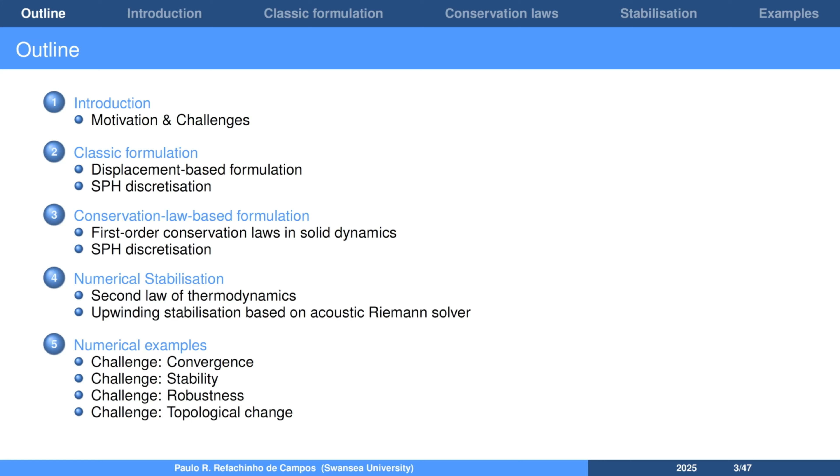So, what exactly do we mean by fast dynamics? Dynamic events can be classified in several ways. For example, in terms of the differences in the geometry and materials of the targets and projectiles. Or another common classification is based on the characteristic velocity involved in the event.

This figure illustrates a range of scenarios at increasing impact velocities, including the drop test of a mobile device, a bird and aircraft collision, ballistics, and the impact of space debris on satellites. What these cases have in common is that they represent high-energy events occurring in a very short time, from milliseconds to less than a microsecond.

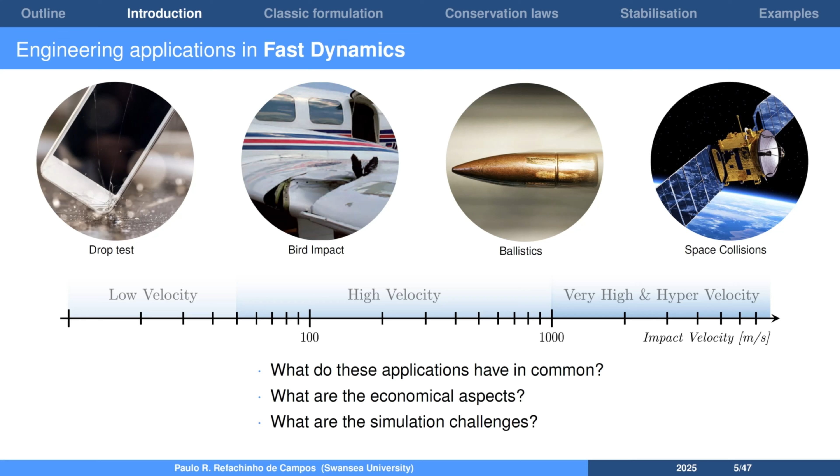Inertia and wave propagation are important features of these events, and they often involve large deformations and potentially fracture. These types of problems have great economical importance, and improving how we understand them can lead to safer and more effective designs. However, experimental testing in these areas is expensive and challenging, which makes computational simulation even more important. But these are complex problems to simulate, and that's why we are here.

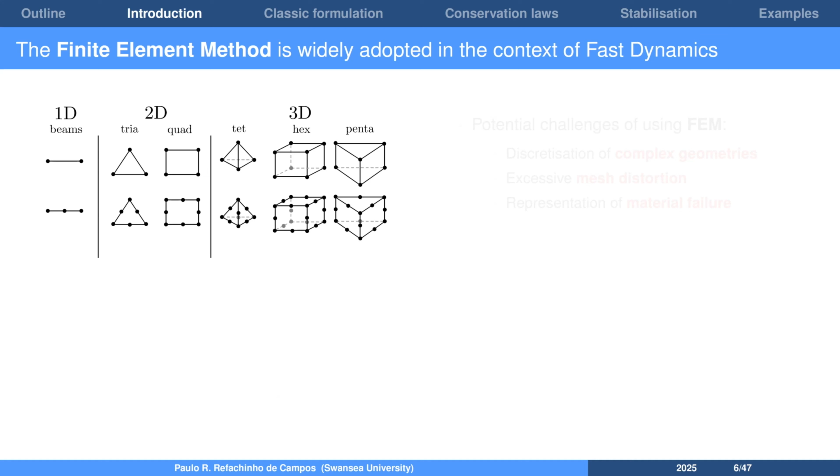The finite element method is well established and widely used in fast dynamics. For example, from impact penetration tests to a full vehicle crash simulation, finite element is the standard tool for many industries. However, there are some challenges that persist.

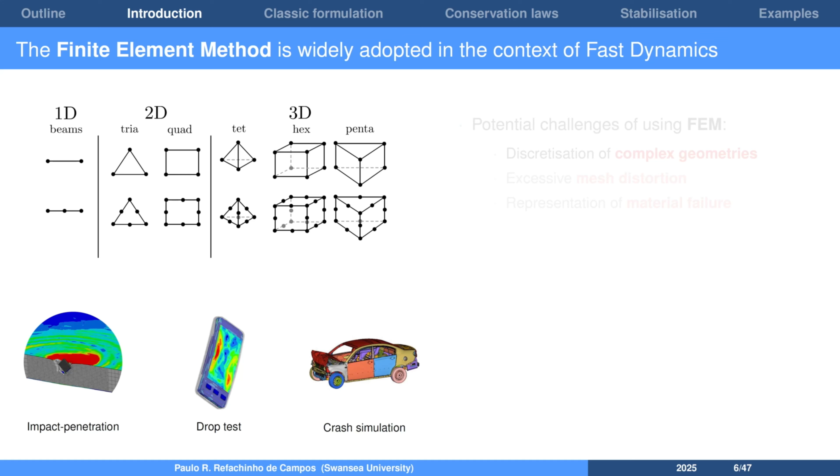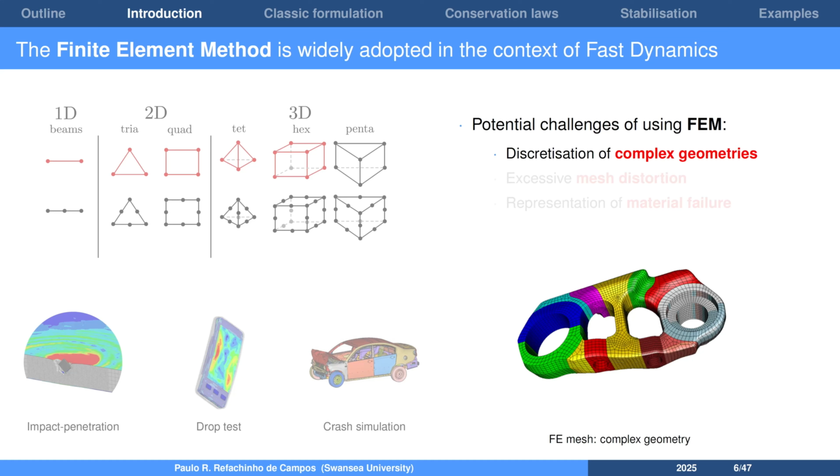For example, the time-consuming pre-processing of complex geometries, mesh distortion caused mainly by large deformations, which can compromise solution accuracy and may require adaptive remeshing, and the complexity of representing fracture, where some simplified element deletion methods can lead to very poor results.

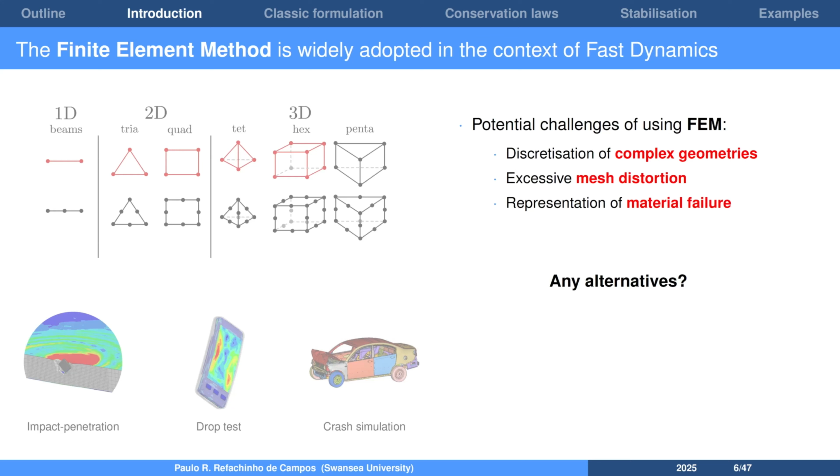And then this naturally raises the question, are there any other alternatives? One promising alternative lies in the family of mesh-free methods, specifically the Smoothed Particle Hydrodynamics, or SPH. SPH was the first truly mesh-free method introduced back in the 1970s in the context of astrophysics, and later on adapted for solid dynamics in the early 1990s.

It is a Lagrangian method, meaning it tracks individual particles as they move through space and time, making it especially well suited for solid dynamics. The core of SPH is interpolation theory. The main idea is to approximate a function using values at neighboring points weighted by a kernel function.

A key concept comes from the sifting property of the Dirac delta function, which theoretically allows function reconstruction but is impractical for computations. Instead, we replace the delta function with a smooth kernel function, which vanishes beyond a certain radius of influence.

Then, by applying particle integration, we approximate the integrals as summations over particles, forming the so-called SPH formulation. Typical kernel functions include quadratic, cubic spline, and Gaussian functions. And just as we approximate a function this way, we can also approximate its gradient by computing the gradient of the kernel function.

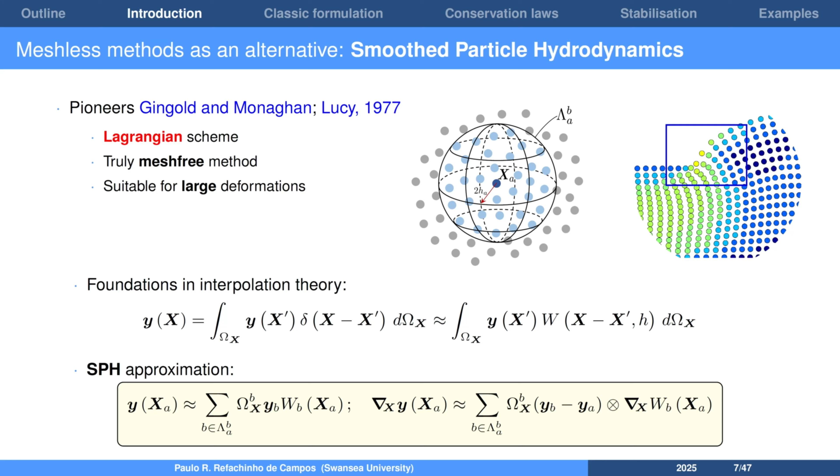SPH has gained popularity since the 2000s, and communities like SPHERIC have identified the SPH grand challenges, with the first of them being convergence, consistency, and stability. This challenge is about managing unphysical energy modes, tensile and pressure instability, and the overall accuracy of the method.

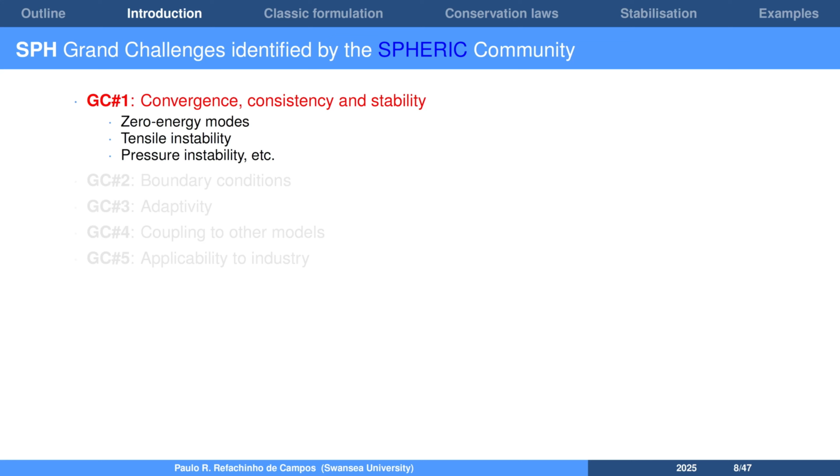Our key contribution is a first-order conservation law-based SPH formulation, which offers a more stable and accurate alternative to classical displacement-based methods. By approaching SPH from this perspective, we can capture a wider range of physics and borrow established techniques from other fields such as computational fluid dynamics. As we will see in this presentation, the conservation law approach facilitates the understanding and the introduction of numerical dissipation to address the grand challenge number 1.

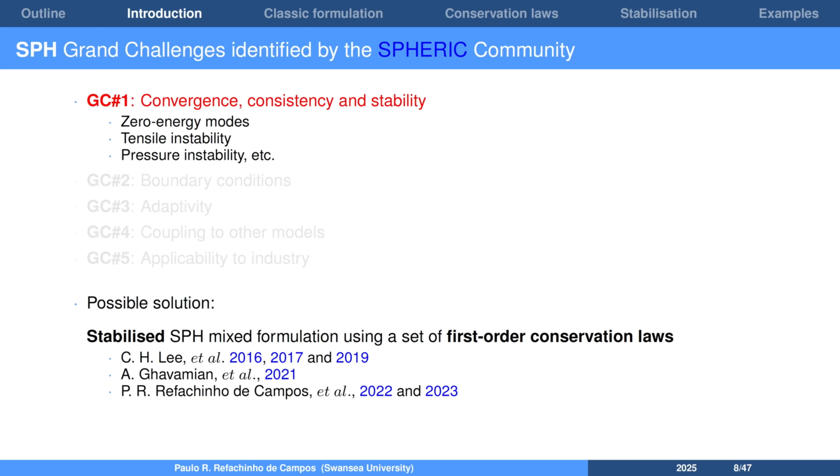Before diving into conservation laws, let's quickly revisit the standard displacement-based SPH formalism.

Let's consider a solid body deforming from its initial state to a deformed configuration. This deformation is described by a mapping function phi, which gives the current coordinates in terms of the material coordinates and time. From there, we can compute velocities and the deformation gradient.

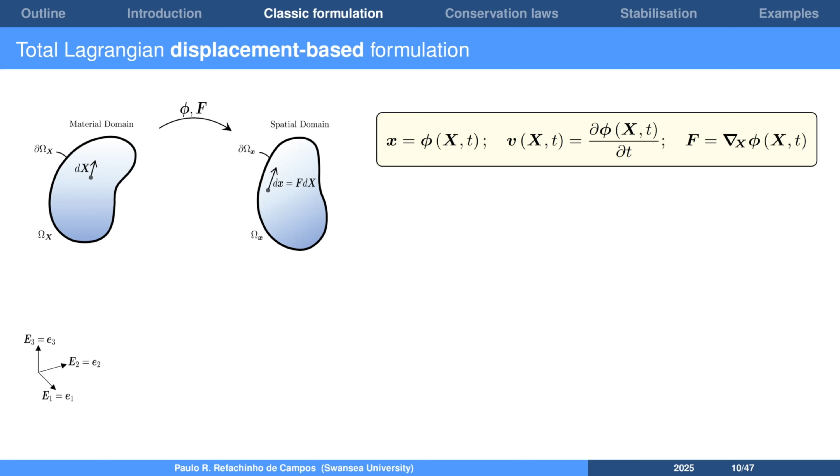In the total Lagrangian approach, we express the governing equations in the material configuration. For example, the equilibrium equation of solid dynamics states that mass times acceleration equals the divergence of the stresses plus body forces. To represent these stresses, we use the first Piola-Kirchhoff stress tensor, P, which depends on F, the deformation gradient. And how do we get P?

So we link stresses and strains through a constitutive model. Once we have P, we use it to update velocities and displacements.

Now here's something very important. The accuracy of F, especially in large deformations, directly affects the quality of the equilibrium solution. That is because first we solve the equilibrium equation to get velocities, then we integrate to obtain displacements. These displacements give us F, the deformation gradient. F is fed into a constitutive model which gives us stresses. And finally, these stresses go back into the equilibrium equation.

That's why many higher order or mixed-based formulations have been developed. The objective is to enhance this process.

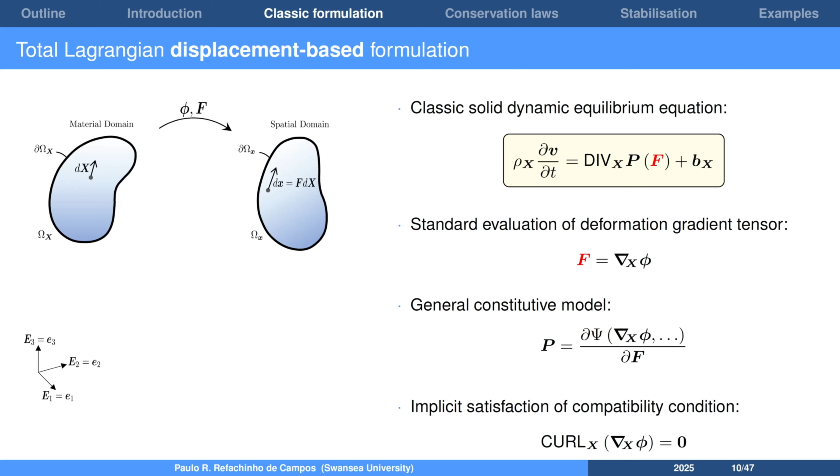Now, let's look at how we would apply SPH to approximate the deformation gradient. The SPH approximation that I presented earlier, a few slides ago, for a generic function gradient, works the same way here. The deformation gradient is essentially the gradient of the current coordinates given by phi with respect to the material coordinates. And we can easily compute the gradient of the kernel function and use it in the summation over particles to approximate F.

Mathematically, this looks similar to finite element shape functions. We basically multiply a kernel gradient by a volume term.

To improve the accuracy, we introduce a standard correction that modifies the kernel gradient by a correction matrix L. This is indicated by the tilde over the gradient symbol here. The use of this correction will ensure that the gradient of any linear field is exactly evaluated. We also artificially introduce the minus phi a term to ensure that the gradient of a constant function will vanish.

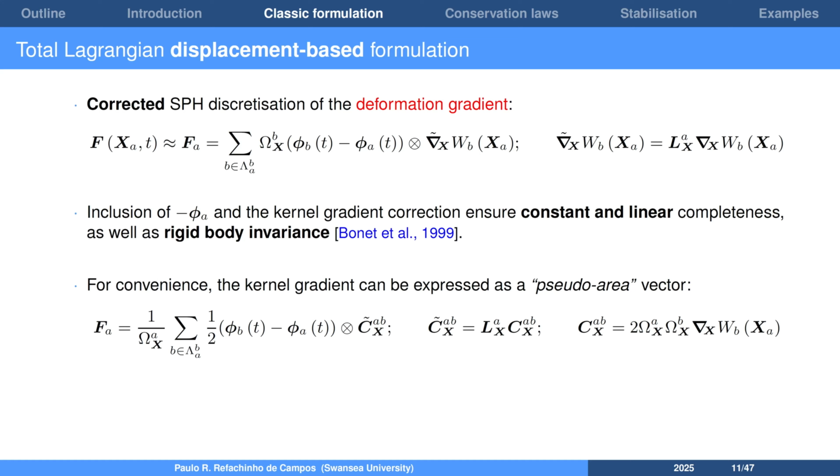We can now write the principle of virtual work, where the term on the left-hand side represents the virtual work of inertial forces, and the terms on the right-hand side represent the virtual work of external and internal forces. We apply particle integration for each of these terms. For the inertial and external forces, this is straightforward. But for the internal forces, we need to approximate the gradient of the virtual velocity field using SPH.

So rearranging this expression gives us a term for the evaluation of the stress-induced interaction force between particles. Putting it all together and recognizing that this holds for any arbitrary virtual velocity field leads us to the discrete form of the dynamic equilibrium equation.

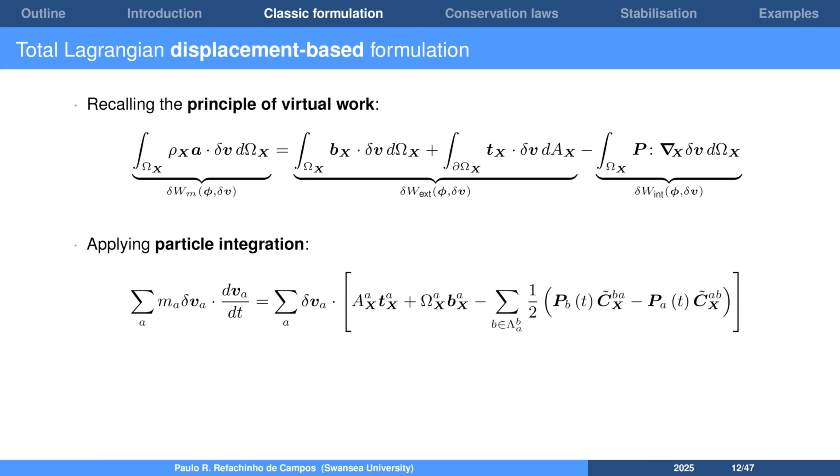In SPH, particles also act as quadrature points, meaning that they carry the physics. Just like in reduced integration for finite elements, we often need to add numerical dissipation. However, in classic SPH, finding the best way to introduce stabilization is not always user-friendly. A common approach is to add artificial diffusion terms, often based on second-order derivatives, such as the Laplacian operator. And these techniques help to control instabilities, but they can be very tricky to tune or to apply effectively.

This challenge is one of the key reasons why we transitioned to a conservation law-based formulation, which we will explore now.

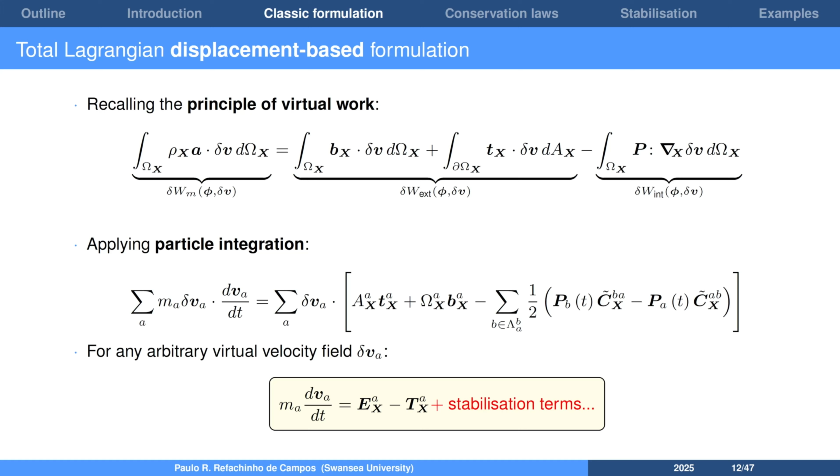So let's now switch to a conservation law-based formulation, and the goal is to improve accuracy, facilitate the coupling between different physics, and also introduce a well-established stabilization technique.

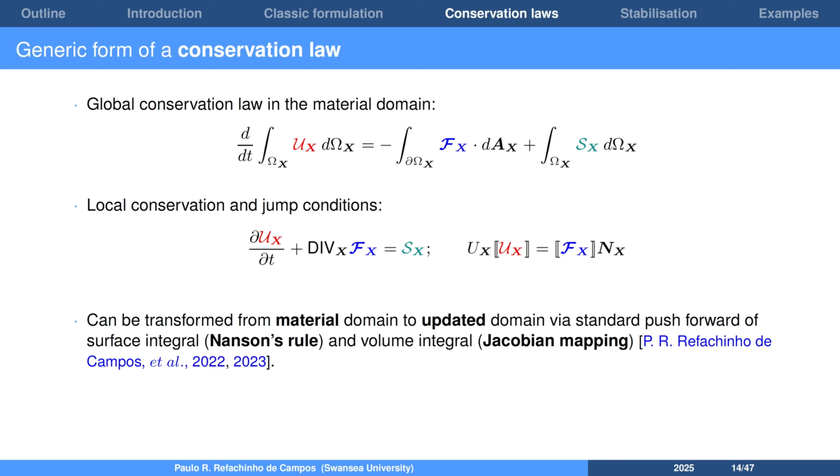Let's consider again the motion of a solid body, described by a mapping phi and a deformation gradient, f. Instead of working only with the material configuration, as in a total Lagrangian approach, or the spatial configuration, as in an updated Lagrangian approach, we can introduce an intermediate reference configuration.

This is done by decomposing the deformation into internal and incremental deformation variables. This allows us to describe the system in terms of this intermediate reference configuration, rather than a fixed material domain.

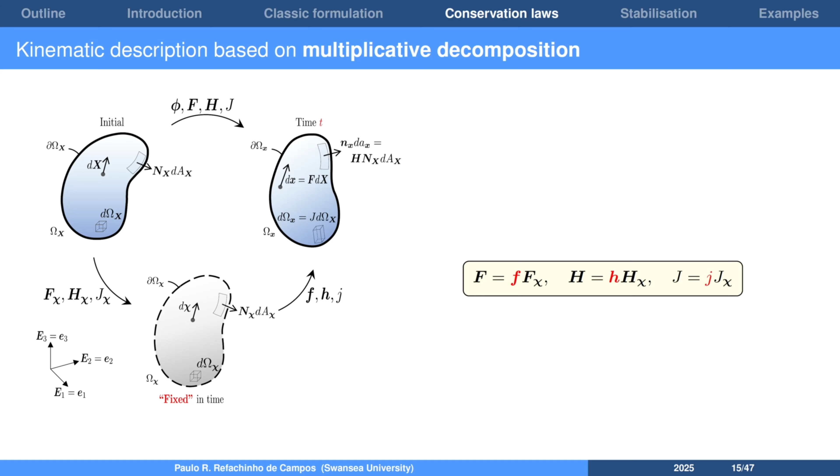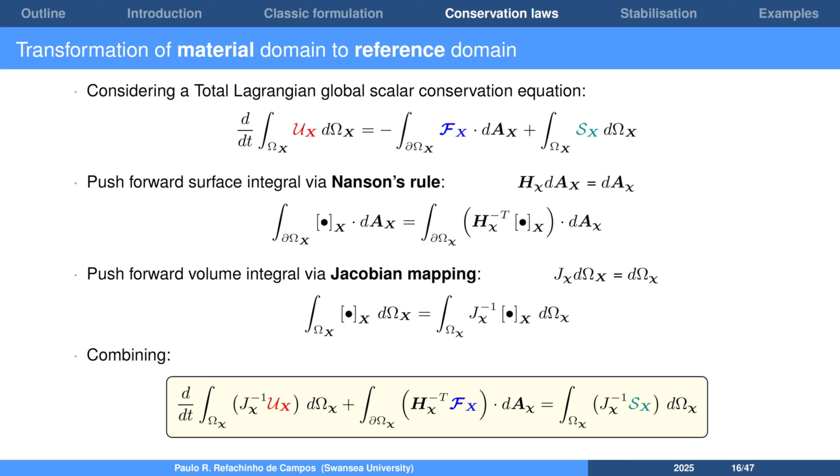If we apply a standard push forward to the total Lagrangian surface integral using the cofactor of the internal deformation gradient, or Nanson's rule, and then a push forward to the volume integral using its Jacobian, we obtain an equivalent conservation law expressed in terms of the intermediate reference configuration. From here, we can once again derive the local form and the associated jump conditions.

Our goal now is to cast the equations of motion for solids into this conservation law form. Basically, this translates into writing a conservation equation for the linear momentum, balancing internal stress forces and external body forces. Here we have the total Lagrangian form, which can then be transformed into an updated reference Lagrangian version.

We also introduce the deformation gradient as a primary variable and derive its evolution law. This equation has no external source term, only a simple surface flux dependent on the velocity.

Again, we can start with the total Lagrangian version, which can then be transformed into an updated reference Lagrangian form. Having the deformation gradient solved along with the linear momentum as a primary variable of the problem avoids the reduced order of accuracy often observed for stresses and strains in displacement-based methods.

Finally, if we want to capture thermomechanical behavior, we can optionally extend the system by including the first law of thermodynamics, here expressed in terms of the entropy, and this will allow us to model temperature evolution as well.

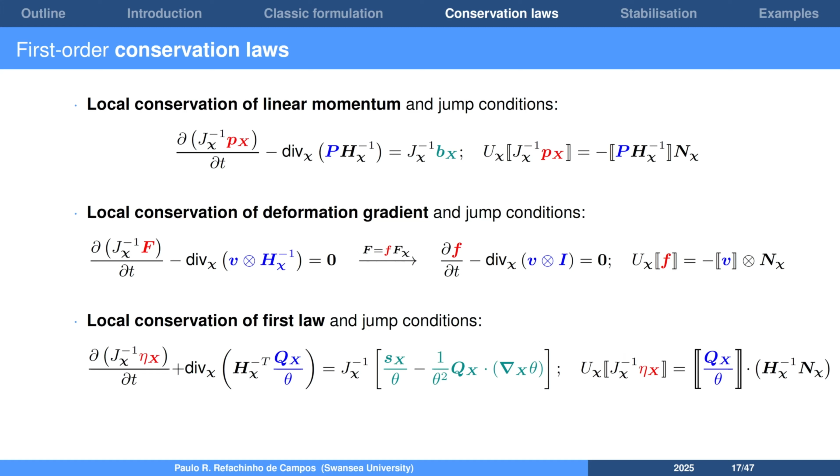Here is the total Lagrangian version of the set of equations in a compact form, and the updated reference Lagrangian counterpart. With both forms side by side, we can clearly see how similar they are. However, we should note that the updated reference Lagrangian introduces a new reference configuration that can be updated as required. So how exactly is this reference configuration defined?

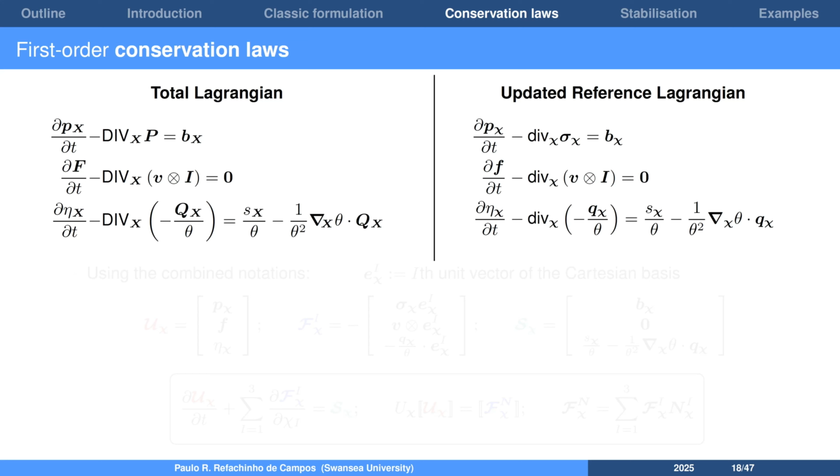Let's look at this from a time-discrete perspective. At the initial time, t0, the reference configuration matches the initial geometry of the problem, and the internal deformation variable is simply the identity.

At this stage, we compute the kernel gradients for our SPH approximation based on this reference configuration. Then, as we advance in time, we solve for the incremental deformation variables. Since the reference remains unchanged during these steps, we don't need to recompute the kernel gradients. This is exactly how a total Lagrangian simulation works.

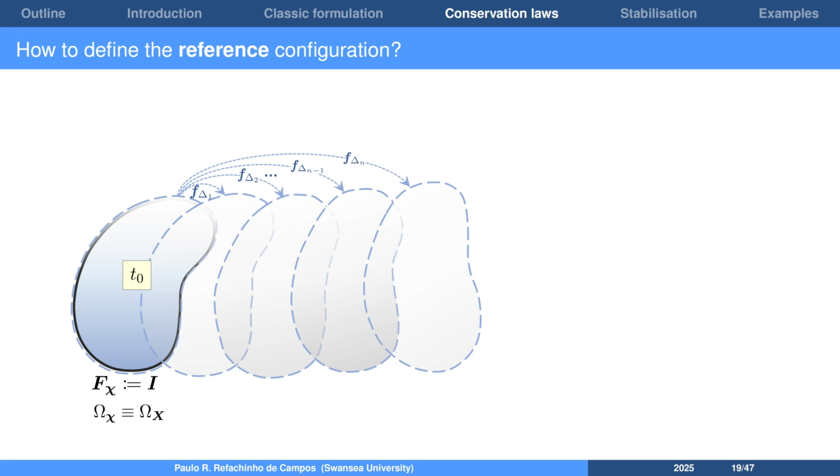After several time steps, we can update the reference configuration to match the current deformed domain. When this happens, we must recalculate the kernel gradients to reflect the new geometry. So from this updated reference configuration, we continue solving for the incremental deformation until the next update.

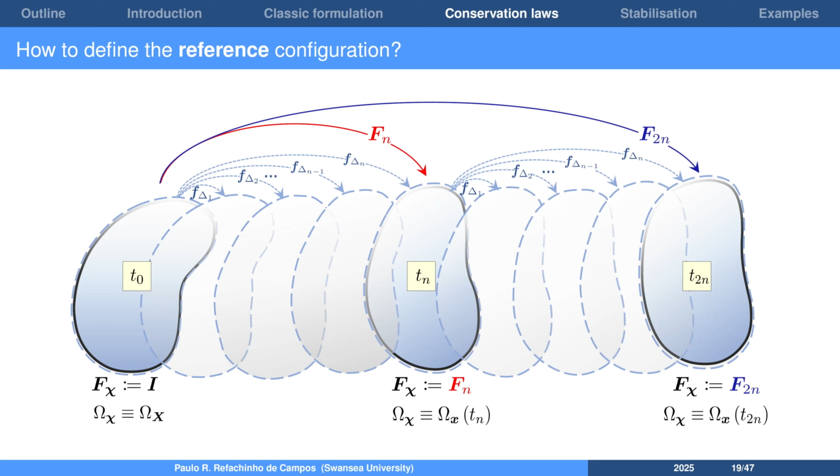This update process can be arbitrary, or it can be triggered by physical events such as a plastic strain threshold or fracture. Before we look at the discretization of the system of conservation laws, let's introduce the concept of ballistic energy.

Ballistic energy combines kinetic energy, internal strain energy, and heat in a single equation. From this expression, we derive the work conjugates for momentum, deformation gradient, and entropy.

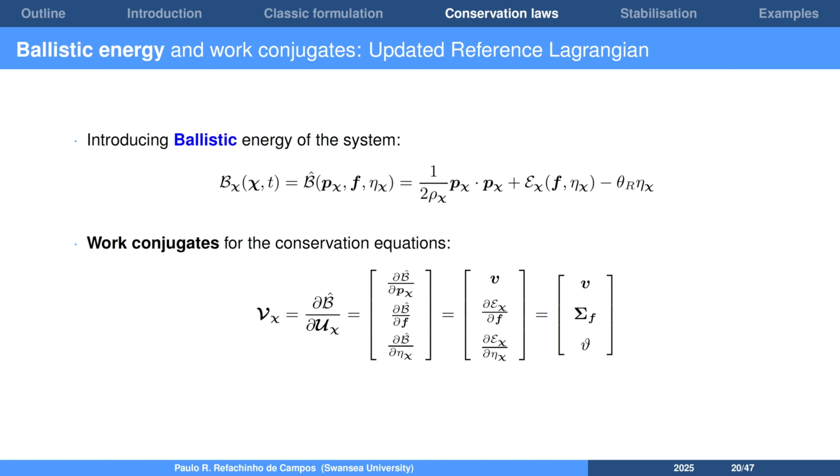To obtain the weak form, we start by multiplying the system of conservation laws by the virtual work conjugates. Next, we integrate by parts, which is crucial because it will allow us to impose boundary conditions naturally.

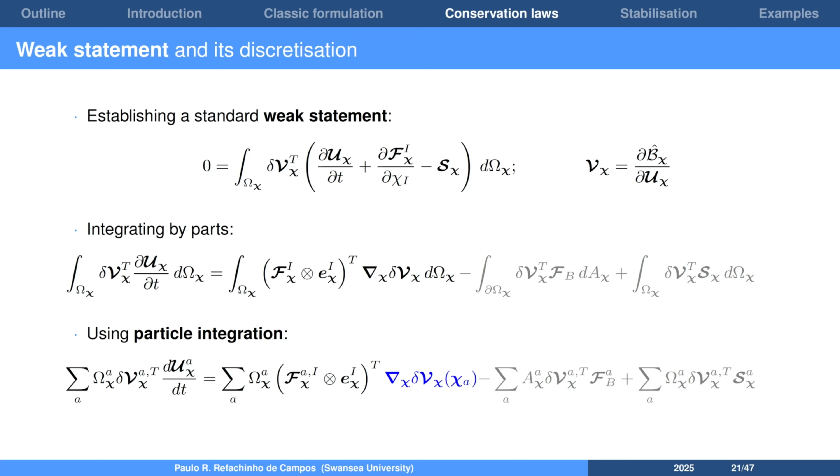Then we apply particle integration, where the SPH approximation will be used to compute the gradient of the virtual fields. As before, we can apply corrections to ensure exact reproduction of constant and linear functions, and then we arrive at the final discrete form of the system of conservation laws.

The goal is to introduce dissipation to eliminate instabilities, for example zero energy modes, without excessive damping or violating the underlying physics. And ideally, we want to do this without relying on case-dependent artificial parameters.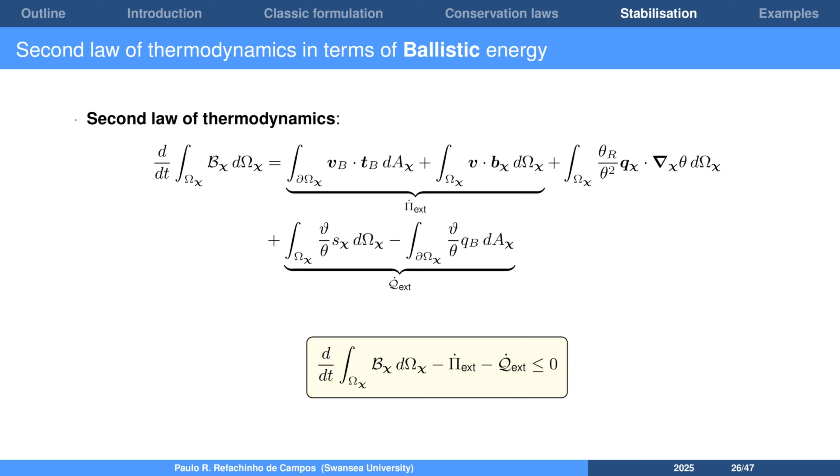Finally, we can derive the stabilization term, and we will begin with this semi-discrete version of the second law. After substituting the conservation equations and rearranging, we end up with an expression that's very similar to what we had in the continuum form, but with this added dissipation term.

This is the same term that we introduced in the momentum equation a few slides ago. To ensure non-negative entropy production, and thus satisfy the second law of thermodynamics, we need the term inside the square brackets to be positive.

By observing the local conservation nature of this pairwise stabilization term, we can express it in a way that directly relates to the jump, or the difference in velocity, between particles.

Now we have this dissipation term D, which still needs to be defined, and the sufficient condition to satisfy the second law of thermodynamics is to define D in terms of a positive definite stabilization matrix that I'm calling S here.

So in this work, we explore a stabilization matrix based on wave speeds, both pressure and shear, projected in the normal and tangential directions.

This approach effectively dissipates non-physical oscillations without relying on any artificial case-dependent parameters. Moreover, for many constitutive models, we can derive closed-form solutions for CP and CS, making this method both robust and flexible.

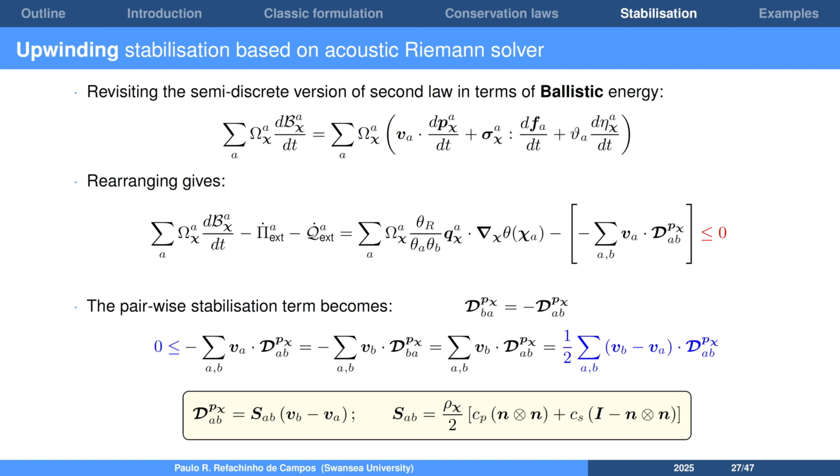Now I'd like to present a few benchmarks and examples. And the first example demonstrates second-order convergence using a manufactured exact solution.

We perform particle refinements and plot the L2 norm error for linear momentum, stresses, and temperature. And all three quantities show second-order convergence.

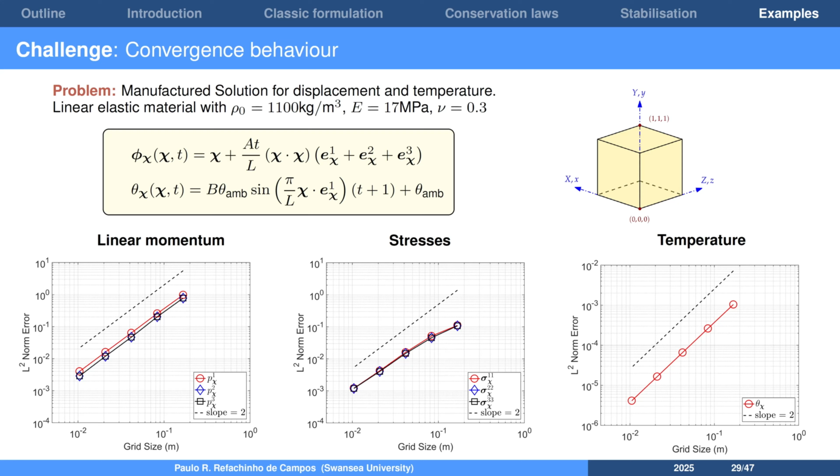In the next example, we have a nearly incompressible twisting bar where the material's Poisson's ratio approaches 0.5, making the problem even more challenging. This example has been widely benchmarked by many authors and involves a squared cross-section column subjected to a twisting dynamic load.

The column is twisted using an initial velocity field with an angular velocity of 105 radians per second at the start. The bottom face is then suddenly clamped, causing the torsion of the column.

Here I'm showing the pressure contours for 3 different formulations: the updated reference Lagrange formulation, the total Lagrange formulation, and a conservation law-based formulation implemented in vertex-centered finite volume in OpenFOAM.

On the far right of this figure, you can also see the result from a classic non-stabilized displacement-based SPH formulation, where pressure instabilities are clearly visible.

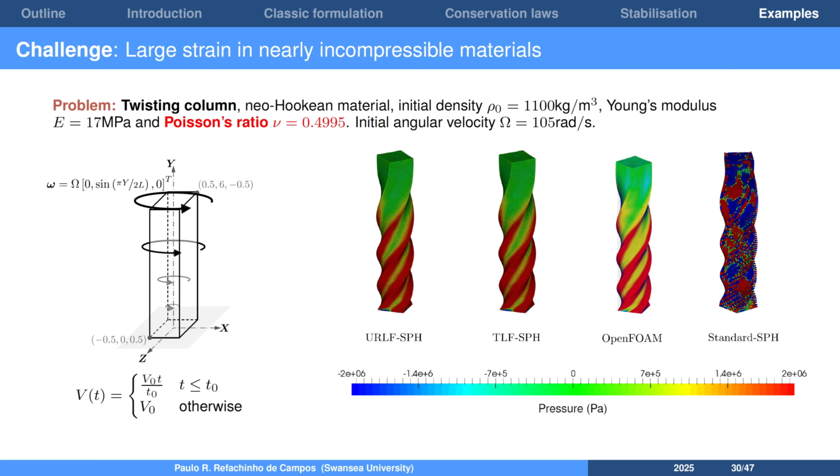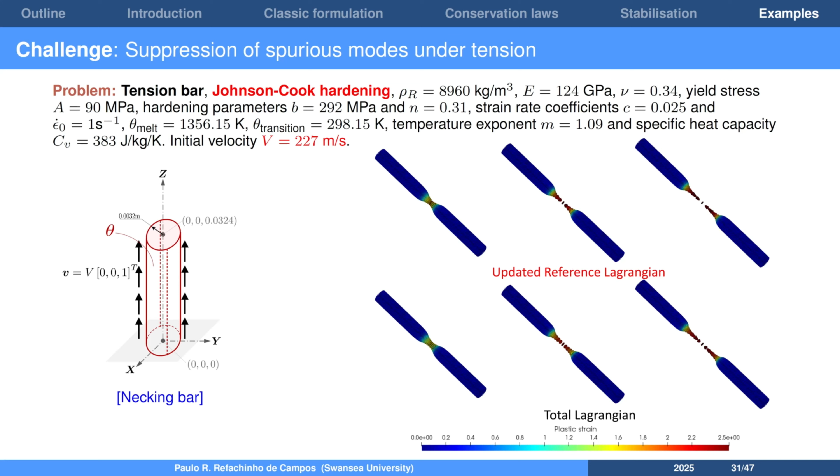Now let's look at a more complex example: an elastoplastic bar undergoing rapid stretching, which causes necking at the midsection. I want to show you an animation comparing 3 different formulations.

On the left, we have the classic displacement-based formulation, which experiences pressure instabilities at the necking region. In the middle, the total Lagrange formulation solves the problem but is less accurate in describing the necking behavior as the simulation progresses. On the right, the updated reference Lagrange formulation provides a more accurate representation of the necking phenomenon.

It's very important to note here that this is not a fracture simulation, so these gaps between particles result from extreme stretching. In a real-world scenario, the bar would eventually fracture into two parts.

However, our goal here was to push the formulation to its limits and evaluate the performance under severe tensile deformation.

This example is also important because it demonstrates how our updated reference Lagrangian SPH methodology can mitigate spurious modes often encountered in traditional updated Lagrangian SPH, especially in problems like this involving massive stretching.

We accurately capture the onset of the necking with very few particles, and we solve the post-necking deformation behavior effectively without introducing non-physical hourglass modes.

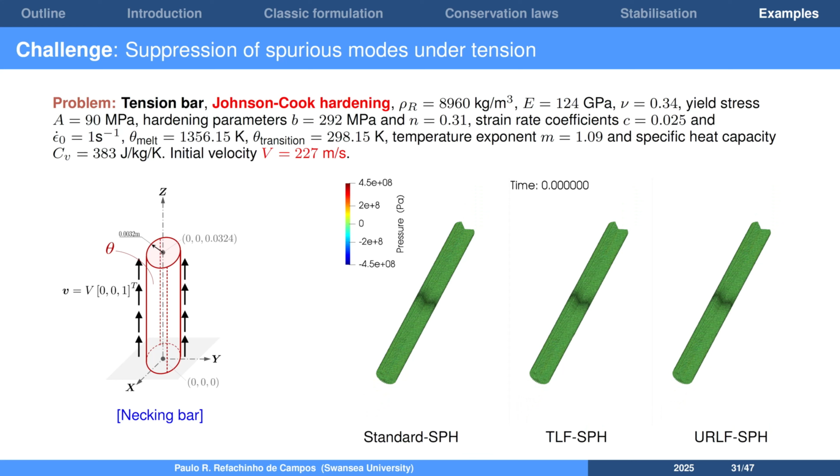Now let's look at a more practical application: a soft robotic gripper undergoing thermoelastic deformation. The gripper has 4 flexible arms attached to a hollow hub. It is made of a nearly incompressible neo-Hookean material, and the deformation is driven by a constant traction force at the arm ends, combined with heat conduction due to the temperature difference between the hub and the arm ends.

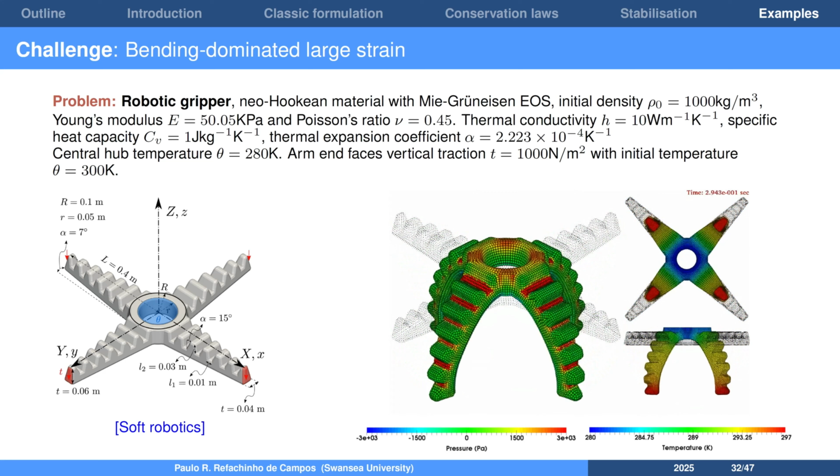In this case, our SPH formulation captures the interaction between thermal expansion and mechanical deformation very accurately. We observe smooth pressure and temperature distributions, even in this bending-dominated large deformation scenario, which could be challenging for other formulations.

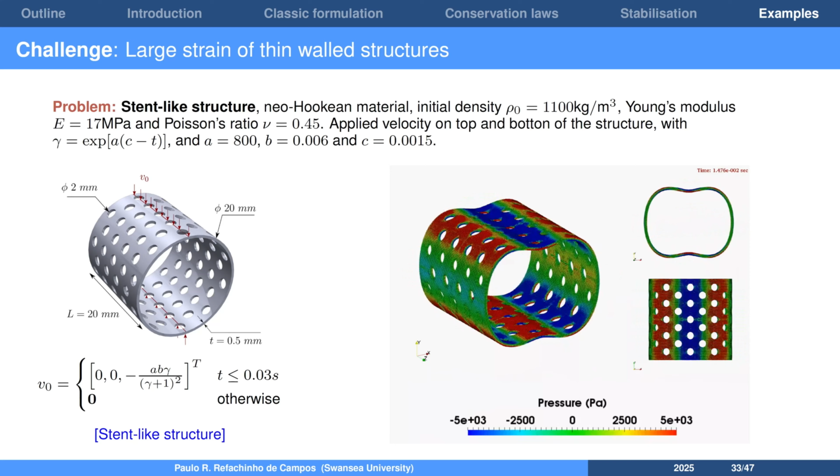And as you can see from this other version of the stent, the complexity of the geometry doesn't pose any limitation. So this demonstrates that the methodology can be effectively applied to a range of fields.

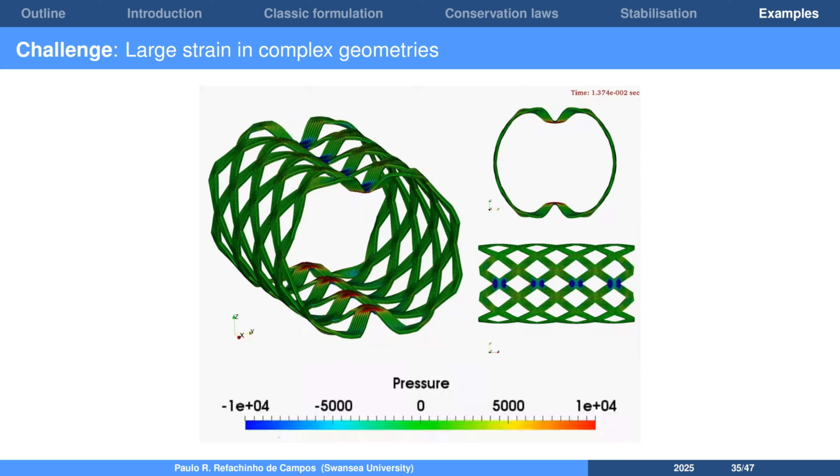Now, in an example similar to the necking bar, but loaded in the reverse direction, we examine the impact of a copper bar against a rigid wall. This is a classic benchmark with very well documented experimental data. It goes usually by the name Taylor bar, or Taylor impact bar. The bar impacts a rigid wall with a velocity of 227 meters per second.

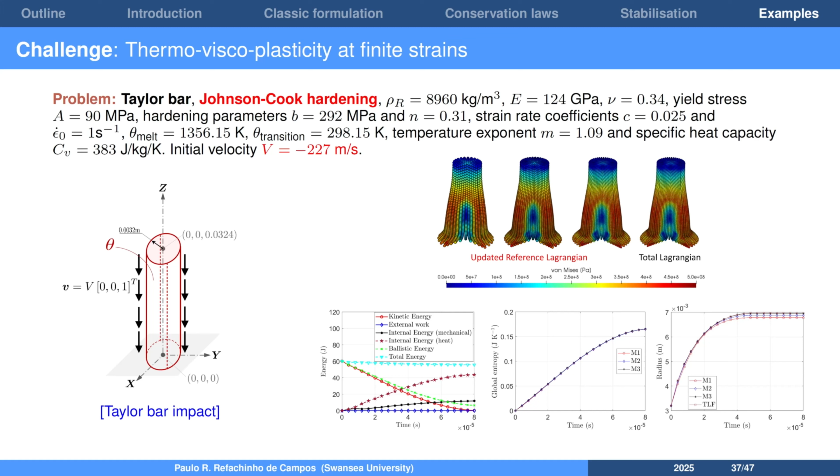The updated Lagrangian results show excellent agreement with the total Lagrangian SPH algorithm, and the simulation captures smooth pressure and temperature profiles, highlighting the ability to handle high-speed impacts and large plastic deformations.

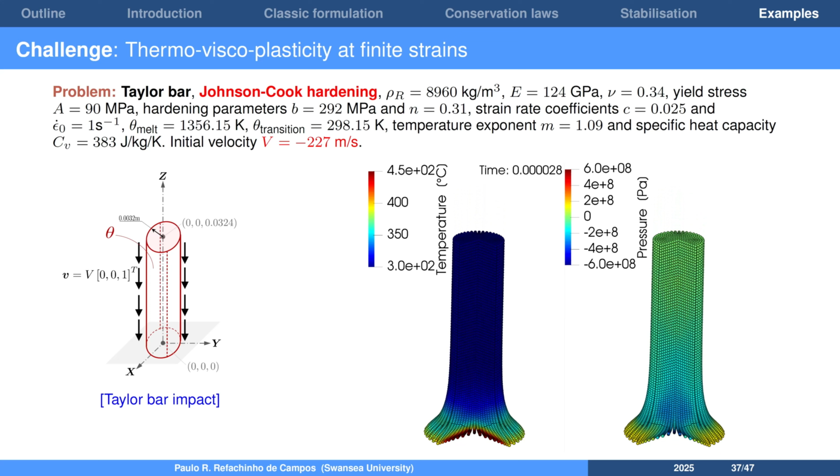As a final set of examples, I'd like to show some ongoing work on dynamic brittle fracture. One important point to keep in mind is that in mesh-free methods, a continuous crack will likely be represented as a group of contiguous fractured particles. To model this kind of behavior, there are a few key ingredients that we need.

Number one is a failure criterion to determine when fracture occurs, such as the Rankine criterion, which defines a threshold on the maximum principal stress. Number two is an updated formulation of the equations, and this is where the updated reference Lagrangian SPH formulation that I just presented becomes especially useful. And finally, a post-fracture model, such as a traction crack opening law, to describe how the material behaves after failure. To keep things simple, we can start with a linear cohesive law tied to the Griffith fracture energy.

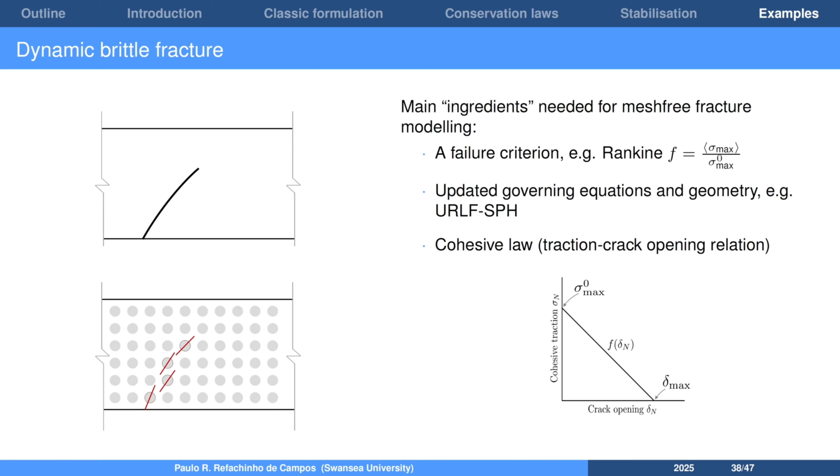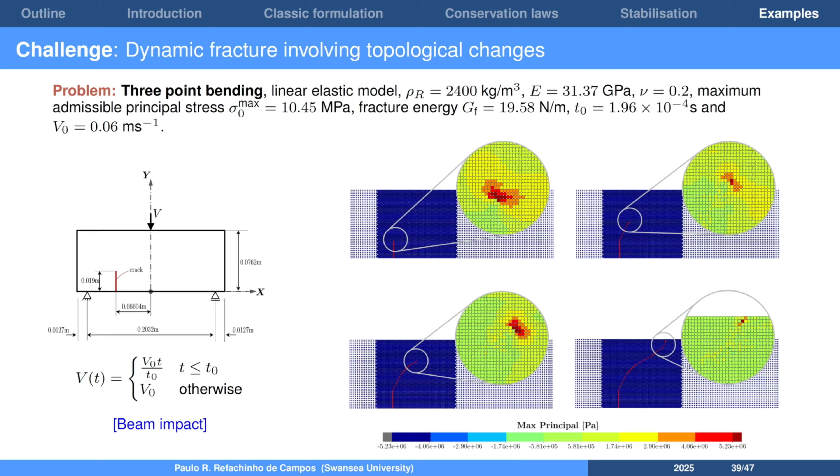With this simple initial approach, we have already been able to reproduce crack patterns from classic dynamic fracture benchmarks quite well. In this first example, we demonstrate the prediction of dynamic crack propagation in a beam with an offset edge crack subjected to an impact load. Crack propagation is driven by the Rankine criterion, and here I'm showing both the crack pattern and the maximum principal stress at the crack tip.

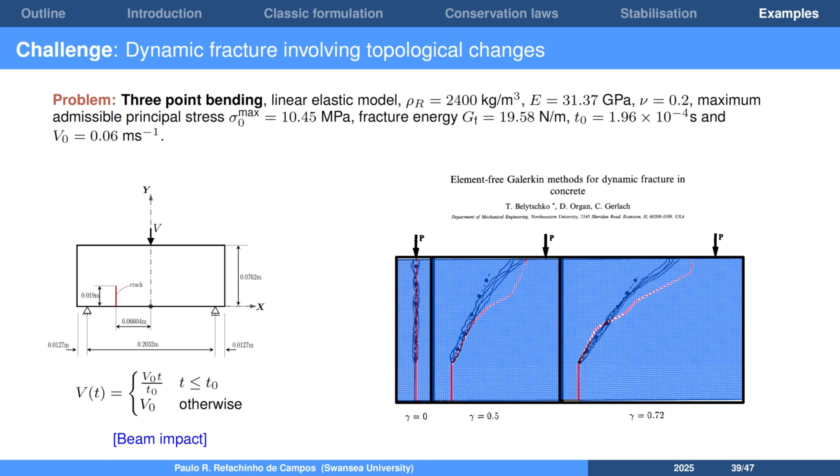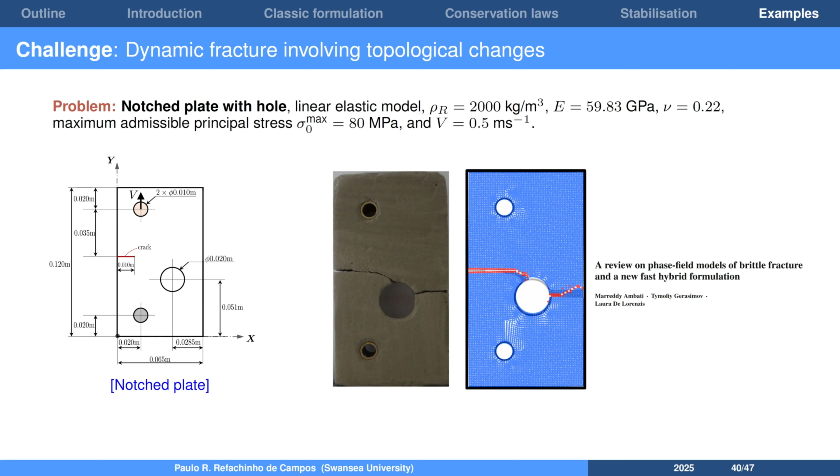In this other example, we model crack initiation and propagation in a notched plate with a hole. The load is applied by a top pin and the plate is fixed at the bottom. The hole offset from the center induces mixed mode fracture. The material used is a cement mortar, and the crack trajectory observed in the experiments can be successfully predicted by the numerical simulations.

This is all preliminary work that we've been developing in the past few months. We are now investigating more detailed comparisons, focusing on parameters such as the crack tip propagation speed and the energy release rates. So these analyses will offer deeper insights into dynamic fracture, allowing for more comprehensive understanding of fracture behavior and the verification of our models.

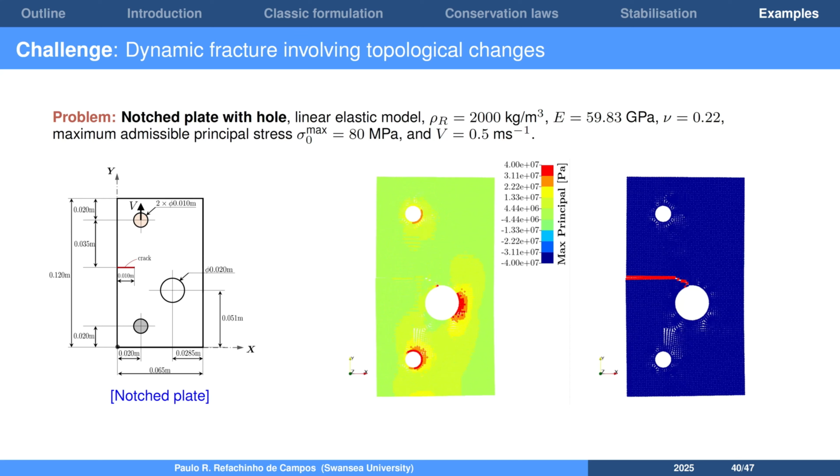That brings me to the end of my presentation. I've covered some of the key challenges we face with SPH, especially around convergence, consistency, and stability. I also introduced a potential solution with the conservation law-based formulation. The main feature of this formulation is its mixed-based set of first-order conservation laws, which improves the accuracy of the stresses and strains, while also enabling the inclusion of other physics like thermal effects. Plus, the structure of the system makes it compatible with well-established stabilization techniques.

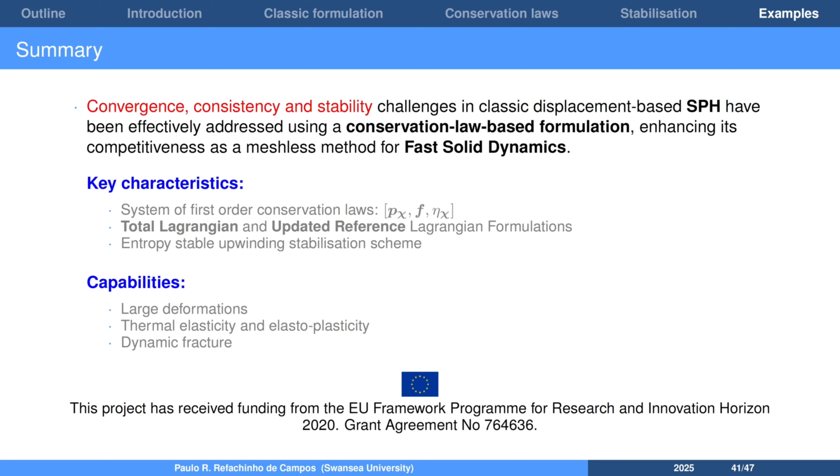This framework works really well for problems involving large deformations, thermoelasticity, and elastoplasticity, and now we are expanding it to tackle dynamic fracture. I will stop here, leave you with some key references, and I'm happy to take any questions. Thank you.